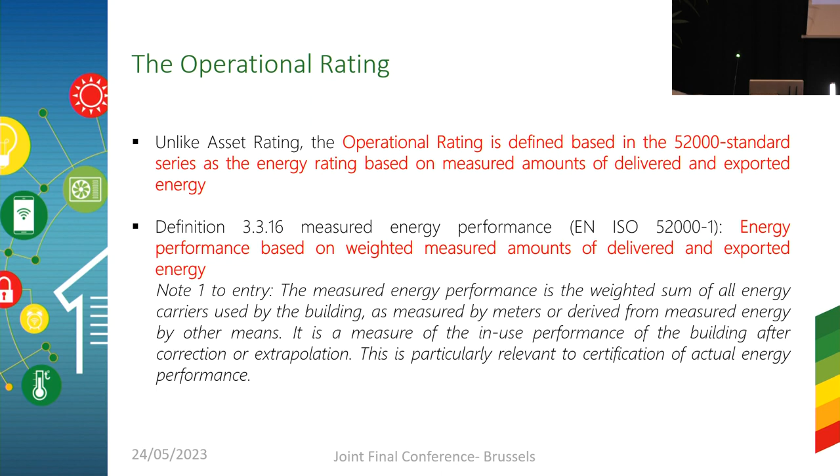Okay, so the D^2EPC worked a lot on the case of the operational rating of buildings. And actually, D2 stands for dynamic and digital. Dynamic, it's a very nice Greek word, which means something that changes with time. This is also what operational rating is about.

It's about discussing how the energy assessment of a building can occur, not just once during the design of the building and the commissioning of the building, not every 10 years as the directive is currently imposing, but that can happen on a regular basis, that is on a biannual or even annual basis.

And this was a vision that we had in the D^2EPC to bring the operational rating closer to the European citizens, to have a solution that would allow for the regular rating, for the regular energy assessment of buildings.

And actually, the tool that was earlier presented by Stavros, I believe that this is the first tool, first software tool that we have available on the operational rating of buildings.

The fact is that currently some member states, particularly 11 member states, have a scheme in place for the operational rating of buildings, but we do not have a common understanding in terms of a European standard concerning what is operational rating and how we perform the operational rating of buildings.

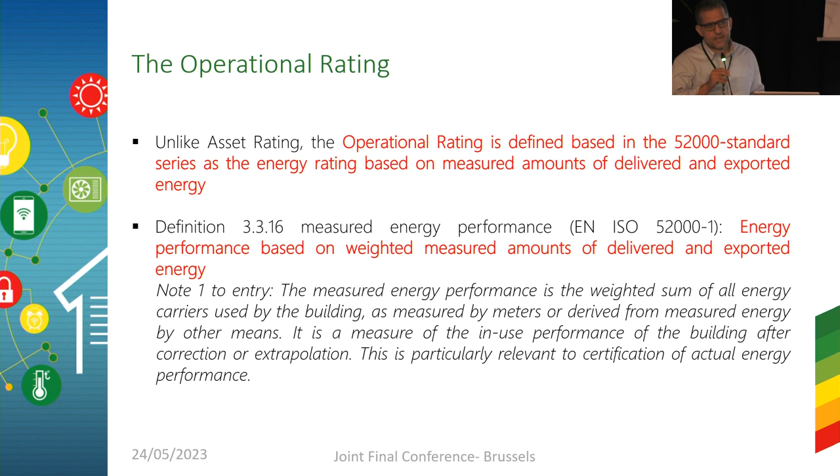There are some elements in the EN 52000 standard series, and this is what we read in this slide. We have a definition in the standard about operational rating, what is operational rating. And we also have some further classifications of the operational rating, which are shown in this slide here.

As you can see, a major element of the operational rating is the fact that this has to be corrected. So we cannot take a measurement and just assess a building. We always need to correct a measurement, to validate a measurement, and to improve it in order to have a correct measurement for an operational rating. And this, of course, is a major challenge that we have in the field.

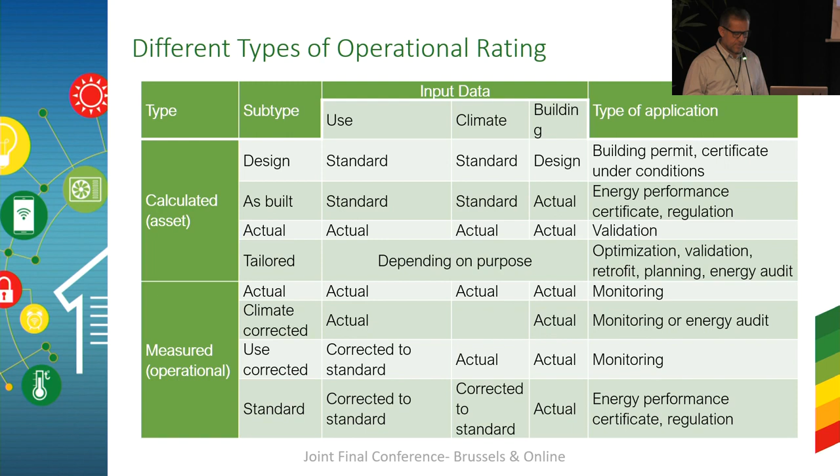If we could discuss some features for the operational rating, we know for sure that the operational rating delivers much more accurate results. It's better to measure energy consumption rather than doing the calculation of it. And apparently when we do the measurement, when we measure for defining the performance of the building, the results that we have are much more accurate. And this is the one element that characterizes operational rating.

What is the second element, which has been the obstacle all these years to having schemes for operational rating developed? It is the fact that in order to measure, we need to have hardware, we need to have the equipment, we need to have the devices installed in a building that provide the information about the actual energy consumption of the building. And the need for equipment actually hindered all these years the development of the operational rating as the major way of certifying the energy performance of buildings.

But recently we have a development. This development refers to the smart meters. We know by definition that by 2030, all buildings across Europe are expected to have smart meters installed.

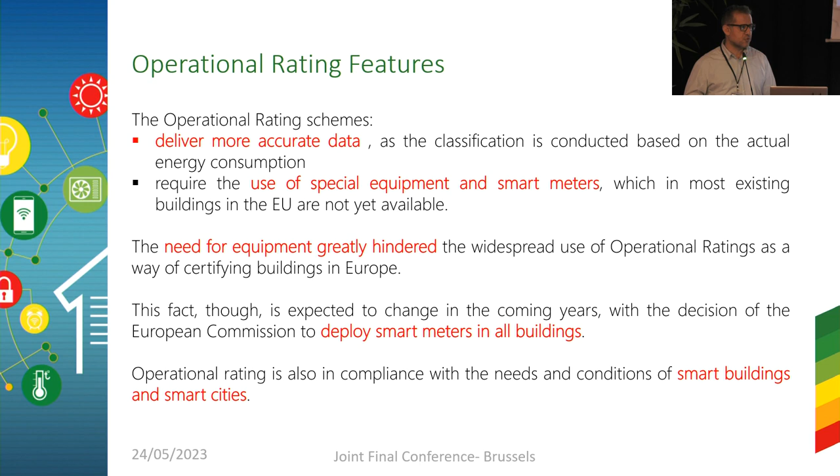The reason for having the smart meters is, of course, not for the operational rating of buildings, it's for the energy market. It's to allow the liberalization of the energy market and the operation of energy suppliers among member states. However, this is a development that also supports the idea of further developing and integrating the operational rating in the European building stock. And this is what we describe now.

We expect that in the following years, 225 million smart meters will be installed in buildings across Europe, and this is a target for 2024.

The member states have already initiated many actions towards this direction, and we do know that with this development, we will have the grounds, we will have much more information required to extract the operational rating for buildings.

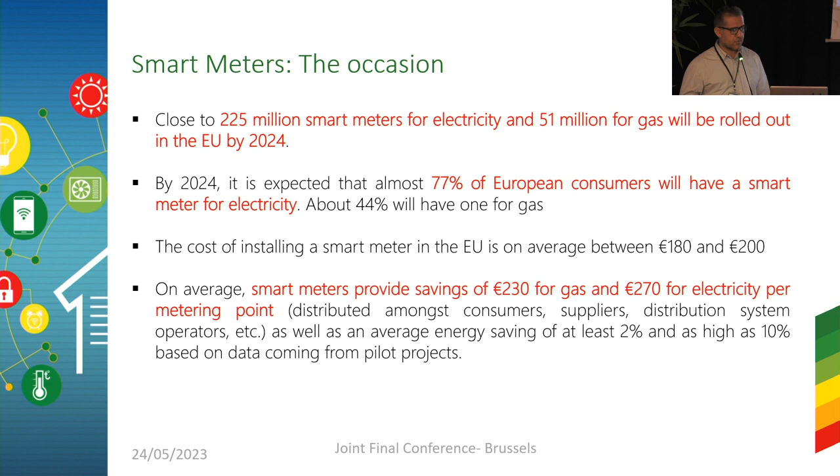Given all the work carried out in the D^2EPC and by realizing the conditions currently in Europe in this field, the D^2EPC proposed to the European standardization body a new standard. The title of the standard is shown in this slide: Energy Performance of Buildings, Operational Rating, Requirements for Assessing Operational Rating.

The proposal for this standard was submitted in September 2022, approved in December 2022, and in February 2023 we had our kickoff meeting, our first physical meeting, with 19 CEN members in Berlin, in DIN, to initiate the activities and all the required steps to develop this standard for operational rating.

As a summary of the scope of the standard shown in this slide, we wish to provide methodologies for data acquisition and data processing in order to obtain measured energy performance assessment and operational rating of buildings. So this is the main scope of the standard.

The measured energy performance can be used for three different purposes as defined in the description of the standard: to rate the entire building or to provide partial performance indicators. I just want to make a statement here.

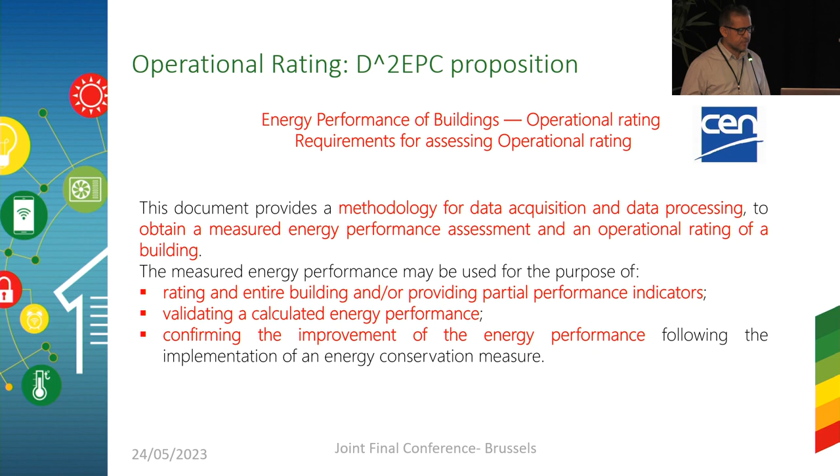Our wording is developed and defined based on the wording of existing standards. So we follow the same rationale and the same approach as for the asset rating standard, to validate calculated energy performance and to confirm the improvement of the energy performance of buildings following the implementation of an energy conservation measure. So this is the overall scope of the standard.

In the next two slides we have a non-exhaustive list of some topics that we wish to analyze and define in terms of this standard.

First of all, we wish to provide the procedures that should be followed in order to derive and deliver the measured energy performance assessment of a building. Now, we have to clarify that these procedures are at this point still not defined in terms of a European standard. So that is why we have identified the gap, and we are working towards delivering a solution and some answers for this one.

The other big question that we have in terms of operational rating concerns the reference building. The vast majority of the member states just provide an energy performance indicator in terms of energy per area. This, though, may not be sufficient and may not deliver comparable results as with the case of the asset rating, meaning that we need some joint understanding and some joint definitions concerning the reference building for the operational rating.

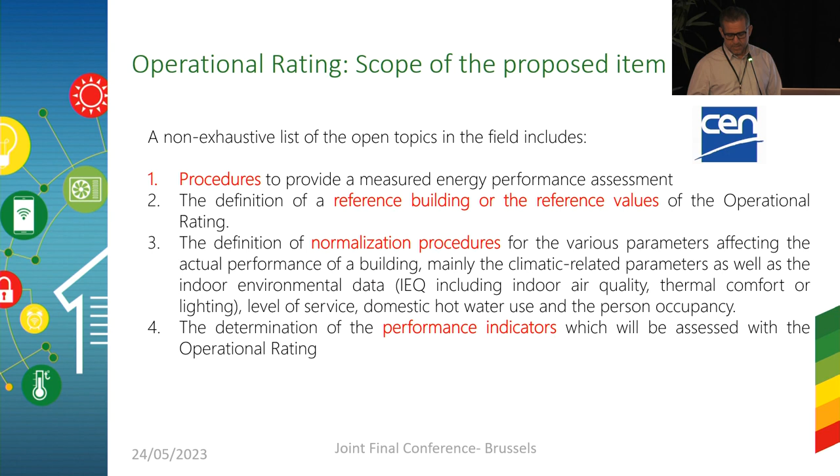We also discuss in the standard about the indicators. There are numerous indicators that can be used to characterize the operational rating of a building: the energy of a different service, by different carrier, weighted by area, by volume, by the age of the building, by occupancy, by different aspects. So we have defined, or we are trying to define, the different indicators that need to be assessed in terms of operational rating.

Also, operational rating is about measuring. So we also need to discuss those properties that need to be measured in the case where we wish to define the operational rating of a building - what we measure, how it is measured, at which frequency, under which conditions, and boundaries, and so forth.

Also, we are trying to introduce some elements which refer to comparison between asset and operational rating. There are some studies in the literature which reveal what is more or less the relation between the two assessments, the two ratings. We wish to introduce some procedures in the standard which will be used to assess the performance of the two different ratings.

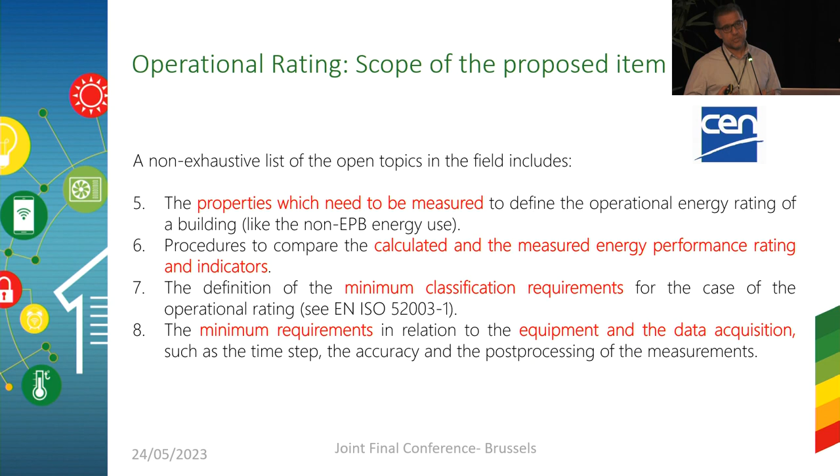Another aspect, in a similar manner as with ISO 52003, is that we also wish to introduce some elements concerning minimum requirements for the operational rating. And of course, we also discuss the equipment - what are the minimum requirements for the equipment which needs to be used in order to get the measurements for performing the operational rating of a building.

As said, this standardization activity is supported and backed up by three projects: the D2PC project, which is a first generation EPC project for the next generation EPCs, and two projects that were initiated last summer, the Smart Living EPC and the Chronicle. All three projects have specific tasks and activities which support this standardization activity.

This is very important based on the fact that in order to complete our standard, we will need another 2.5 years at least. We have another 2 projects currently being implemented that will conclude in summer 25 and will back up this standard.

At this point, I need to state that in terms of the EPC, the partners that have strongly worked for this standard are our coordinator CERTH, FRC, and UNE, the standardization body of Spain. These partners are also actively involved in Smart Living EPC and Chronicle, which secures the fact that the activities related to standardization of operational assessment of buildings will be continued and hopefully successful by the end of the project.

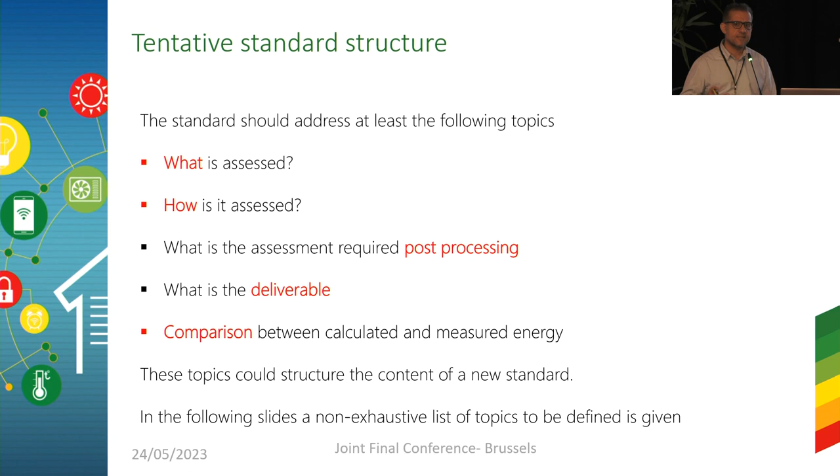The first is to describe what we assess. The second, how we assess it. The third, the post-processing procedures. We also comment on the actual deliverable of the procedure and how we compare the outcomes of the asset and the operational rating.

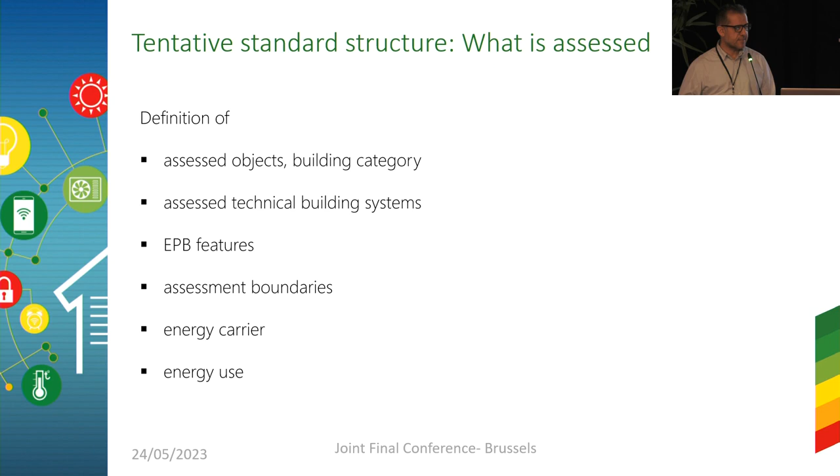In terms of the first question, what is assessed, we are discussing the definition of the objects and the building categories that we are assessing. We describe in the standard the technical building systems that are assessed, the EPB features that need to be considered, the assessment boundaries, the energy carriers, and the energy use.

With regard to how this is assessed, we discuss the equipment and instrumentation that needs to be used for conducting this exercise, as well as the procedures and practices we need to follow in order to develop and deliver the required information for performing the operational assessment.

We also discuss the measurement period, that is the frequency, how often we should deliver the results of the operational rating, as well as the measurement interval, that is what is the interval of consecutive measurements in order to assess the operational rating of buildings.

It is very important to comment that the measurement period introduces new aspects also in the field of policymaking, as a regular assessment of buildings allows for policy measures for improving the energy performance of buildings, and brings the EPCs and the classification closer to energy audits. Having a regular image of the actual energy performance of buildings allows for safe conclusions with regard to measures that need to be taken to improve the energy performance of a building.

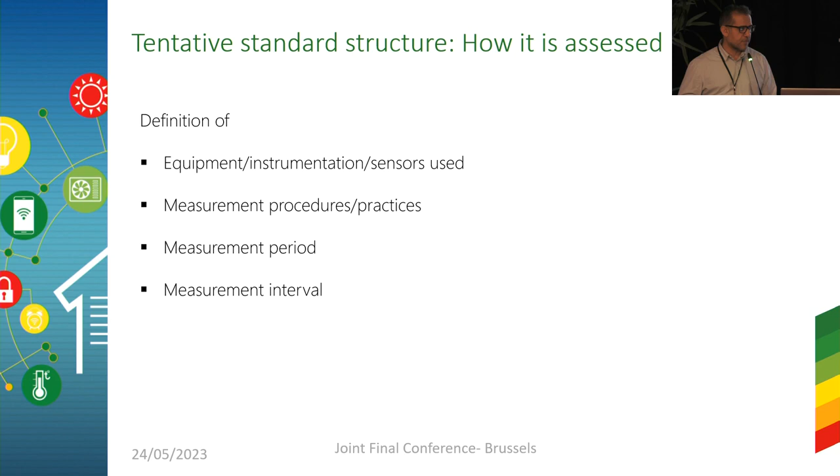In terms of recommendations, this was also demonstrated earlier by Stavros when he was presenting the tool that we have: specific recommendations which are quantified and monetized and allow for regular improvement of the building.

Also, in terms of how we post-process, we discuss corrections, how we perform weather-based corrections, occupancy corrections, or level of service corrections to the measurements that we have, as well as how we develop and deliver reference values for this purpose.

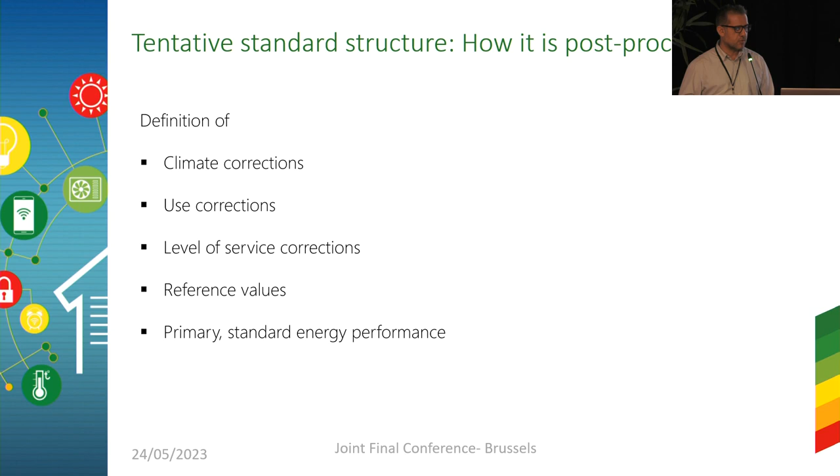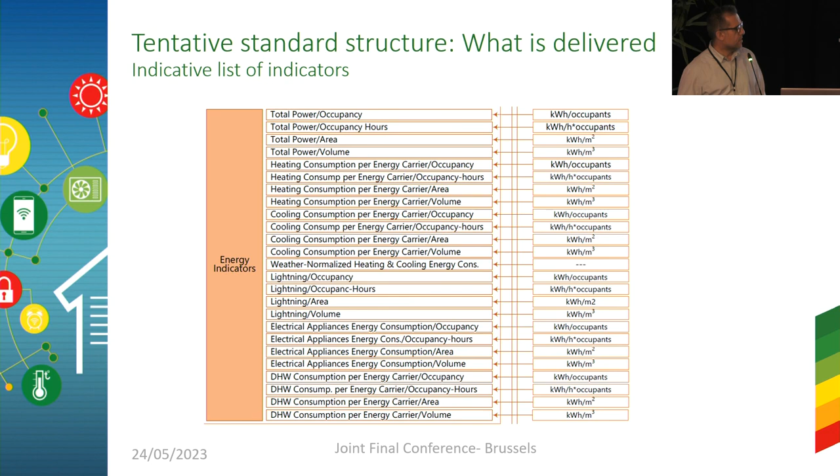We also discuss the primary standard energy performance. With regard to what we deliver from this assessment, we discuss the indicators, different types of indicators, and we have here a set of indicators that were used in D2PC for the operational rating. We also discuss how we assess the different energy carriers, the different energy uses, and how we extract all this information in the certificate.

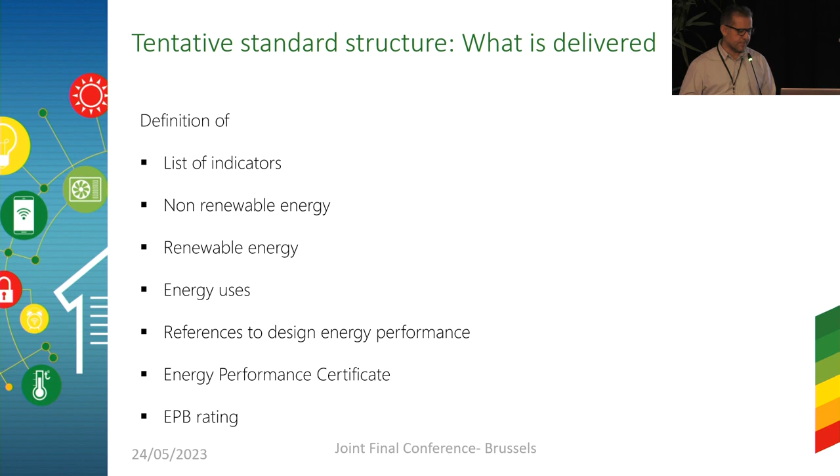And of course, we also discuss the compliance of this procedure with other, let's say, EPB ratings. Now, concluding, I would like to state that...

To our point of view, that is the D2PC team's point of view, the fact that the Horizon-funded project has resulted in a European standard, or at least is trying to result in one, is one major outcome of this project, D2PC. Hopefully, if everything goes well, it will deliver a document that will be used for many years by many engineers, by many public authorities, in order to allow the introduction, integration, and establishment of operational rating schemes.

My last comment, I'm making this as a researcher from Cyprus. Cyprus is a member state with a population of less than 1 million people. So you realize that based on our size, it is very difficult for us to develop this. We don't have the depth of expertise and knowledge to develop and deliver such schemes.

The fact that through a European-funded project we are trying to develop a standard that may be used not just by Cyprus, but also by Malta, by Estonia, by other member states which do not have the capacity to develop these standards alone—this, to our point of view, is one of the major contributions of research to the actual needs of the market.